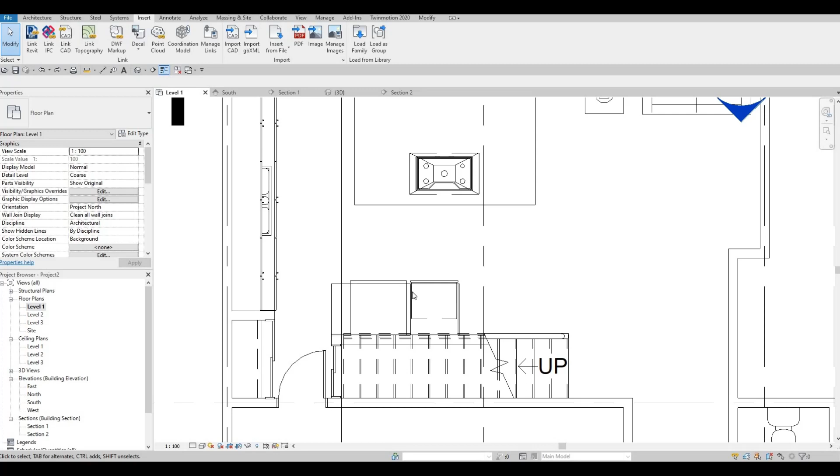So in the previous video, we were able to finish off the kitchen. And as you can see, we have the island and we have the fridge here. And then we added some furniture. And here we're going to continue working on this. And what I want to do is I'm just going to pull this back because I want to add an extrusion later on here. So I'm just going to leave it like that.

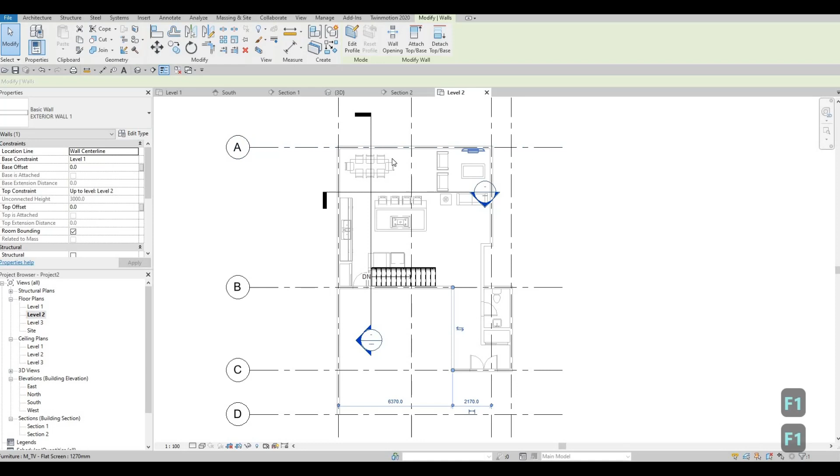But what I want to do now is we should add the second floor. So let's go to second floor. So it will be right here, level 2. And then as you can see, we have an overlay of below. So that's fine because we're gonna create some of the perimeter of the walls with this one.

So let's press escape multiple times and then click on architecture, click on wall, and then we want to make sure that this is exterior wall. And then after that, you want to make sure that it's up to level 3, which it already is, and it's centered, and then it's chained. And then now we're ready to add it.

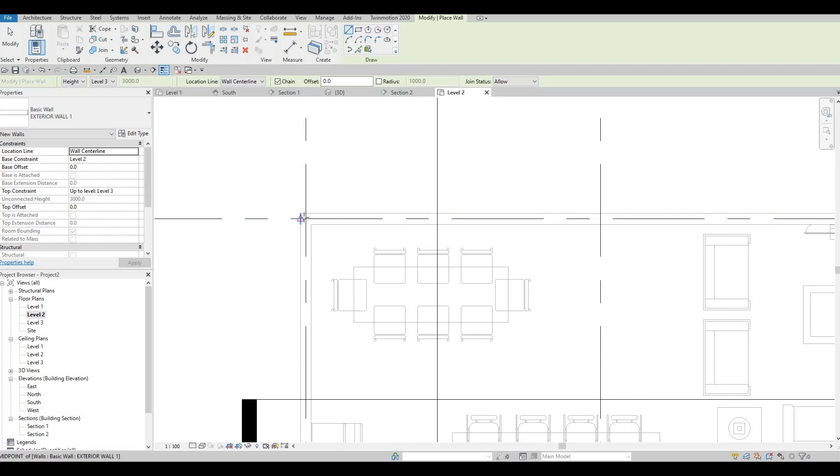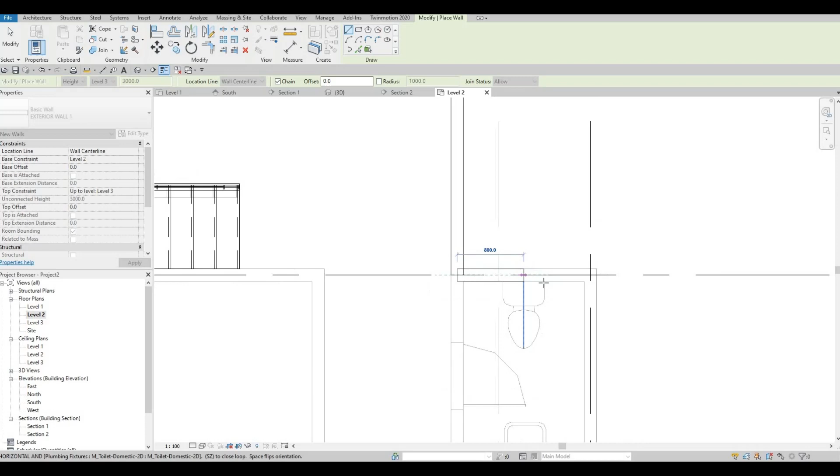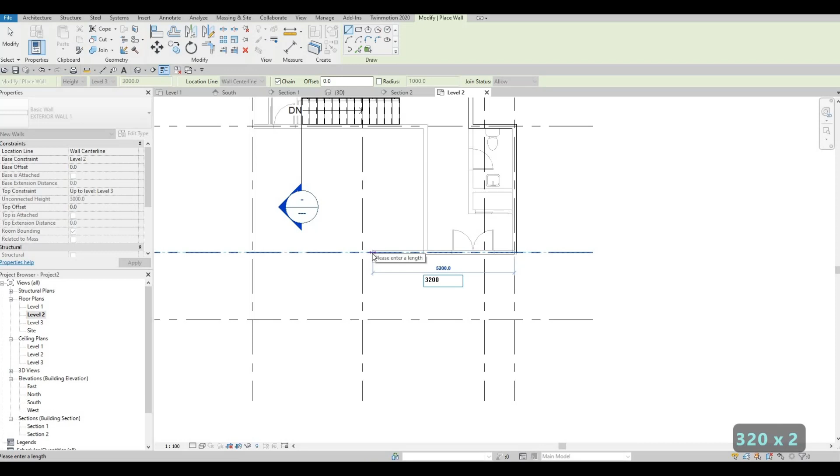So click on A1 up to A3 and then going down and just copying this one at below. So we're copying what we did below. Move it like that. And then now here, what I'm gonna do now is to connect this one up to here all the way to the left side, but typing in 3200. And then after that, after the 3200,

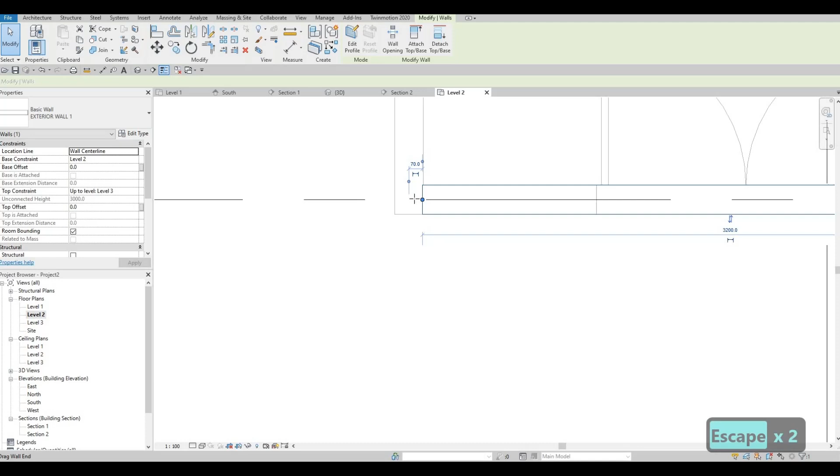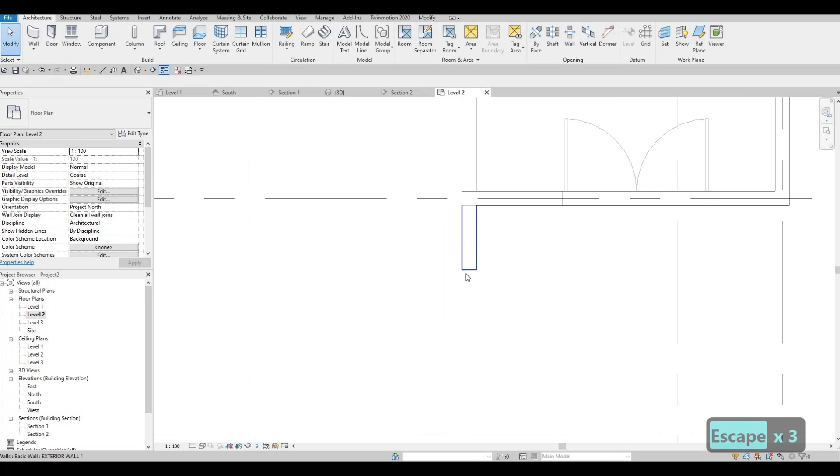what we could do here is click on the wall again. So I press escape so that we could just go on up to here. And then let's just connect this one again like that. And I want to make sure that we have everything aligned. There we go. And then now here, I want it to be around 7 or 800. So I just put it at 800.

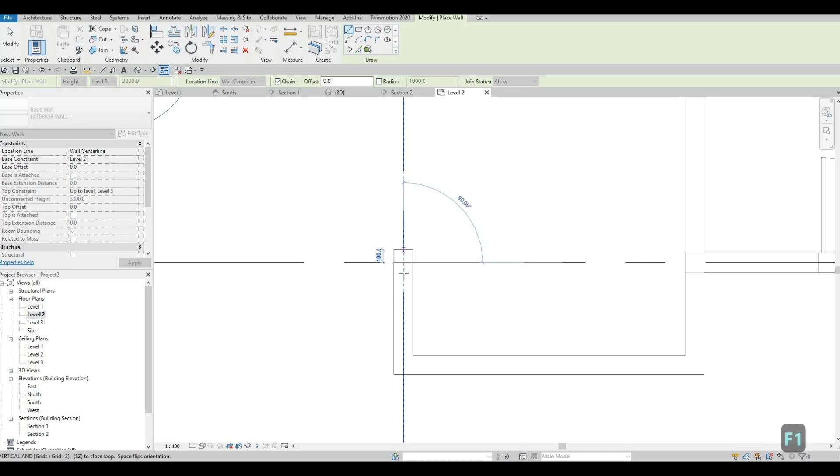And then now we're going to continue working on this and just connect it like that up to this grid line, which is number 2. Go back here. And then now give it a little bit of a gap here. So what I'm gonna do here is we click on CS. Now we're just gonna extend this wall around 500 could be good enough. So you can type in 500. So we're basically clicking here and then just clicking 500.

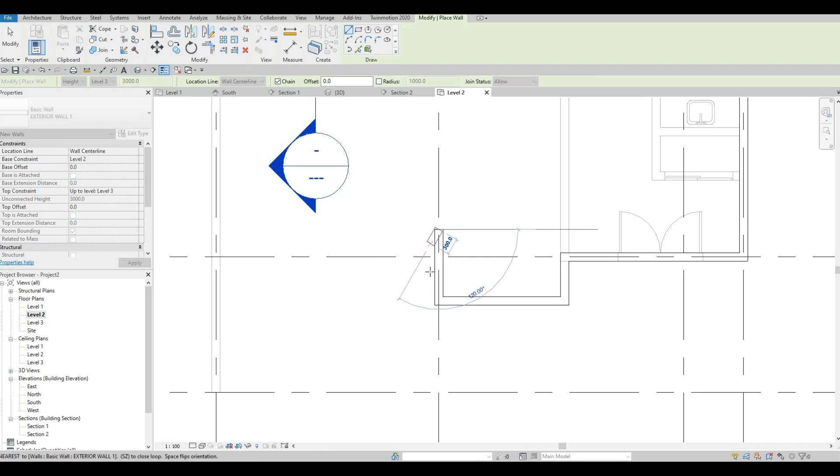And I just want you guys to follow it. That's why I did multiple clicks. But as you can see, this will be just one single wall. So now go up to the number 1 grid. And then you want to finish it off and go into A1 grid. You can then press escape multiple times.

And then now we could go to our properties and then take off range base level under underlay, and then we should put it at none, and then click apply. Now everything will disappear and we won't be able to see what's going on down. So that's fine.

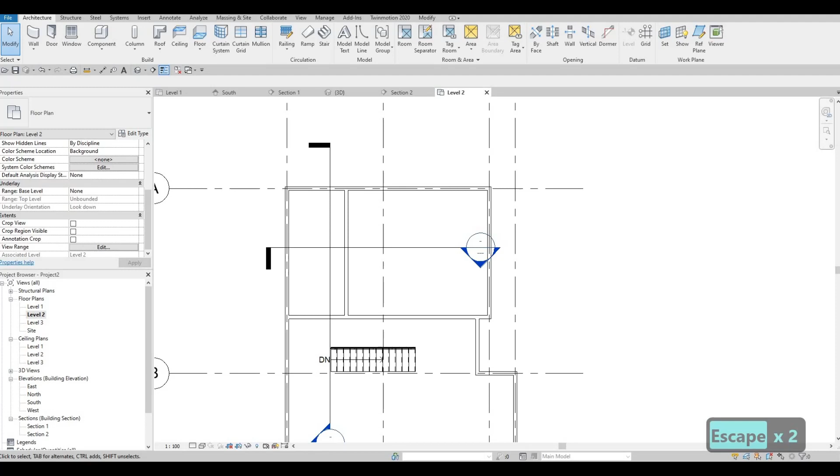Next thing we're gonna do is let's add in the interior wall. So let's change this. So I click on the wall and then just change this to interior wall. And then once we do, we could just connect this one all the way to here. So that's done. I'm gonna add in a wall like this right here. And then through that, we could set up how far it should be.

So here, I'm going to move this temporary dimension right here. And then from here, I'm just gonna type in, I want it to be 980. So it went back because I set it from here. After that, let's add in the same wall. So you can type in CS now and then click on this wall. And then now click on the wall again and you want it to be set around 3140. So 3140, it will be right here, and we're gonna set it up again.

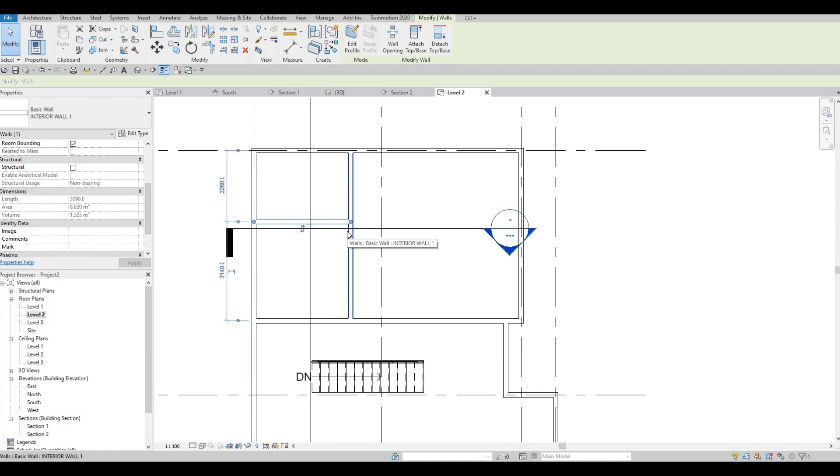So let's add the same one. So click it, CS, and then let's add a wall right here. And then that wall should be around 1340. And then let's add in something like that. And this one will be around 1240. So that's fine. And later on, we're gonna pull this out because this one is a shower area.

And then now, let's add in more walls. So now we're just adding the walls so that we could manipulate the area. I'll be adding a wall right here. So I added the wall somewhere right here for now. And then add another wall right here. And then this wall should be around 1300. So that's good enough.

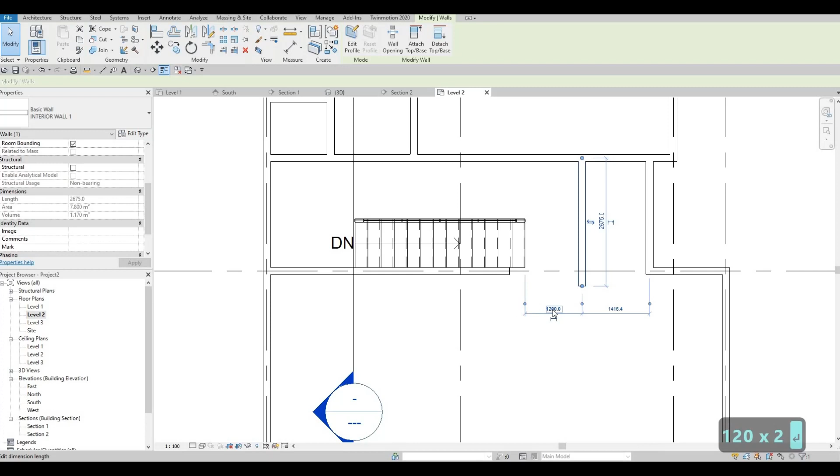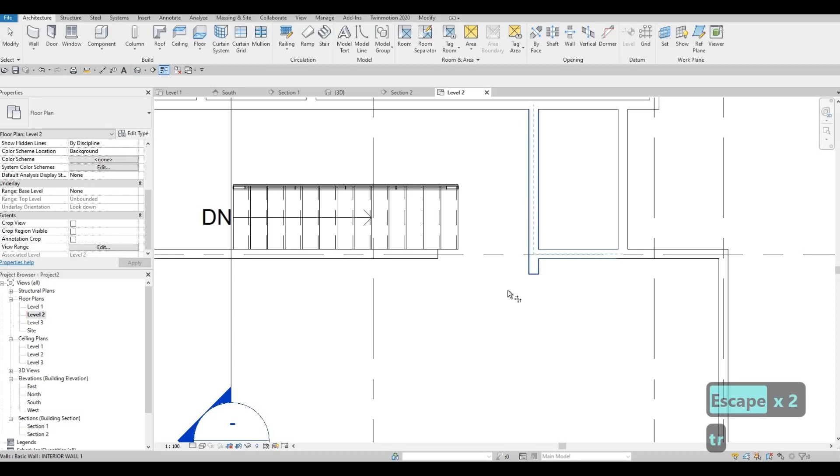Maybe we could put it at 1200. So I put it at 1200 like that. And then we're gonna add a wall right here as well. So CS on this, and we're gonna pull this back. Let's use trim and extend so that we could just trim it like that fast enough. And then same wall, we're just gonna add in a cabinet here, like so. That's too big, so around 600 will be good enough.

And then 600 by 600. Okay, we're going to extend this a bit, maybe around, I'm gonna pull this one around 1000. So let's check that earlier, how far will it, so around 1000. So that's good enough.

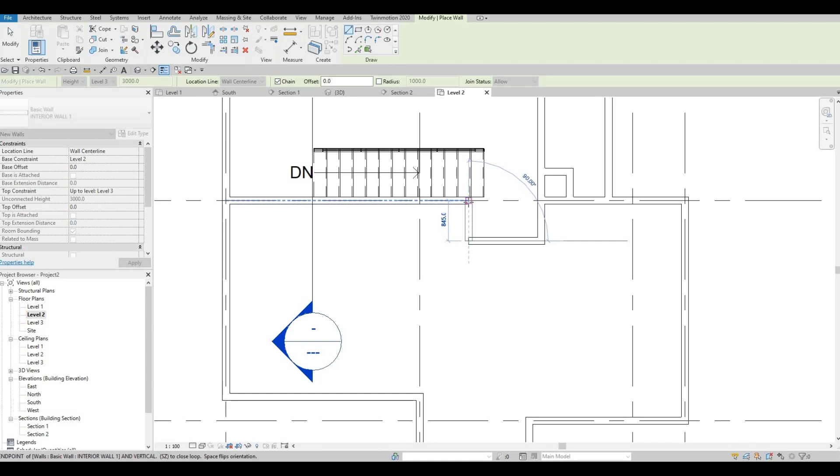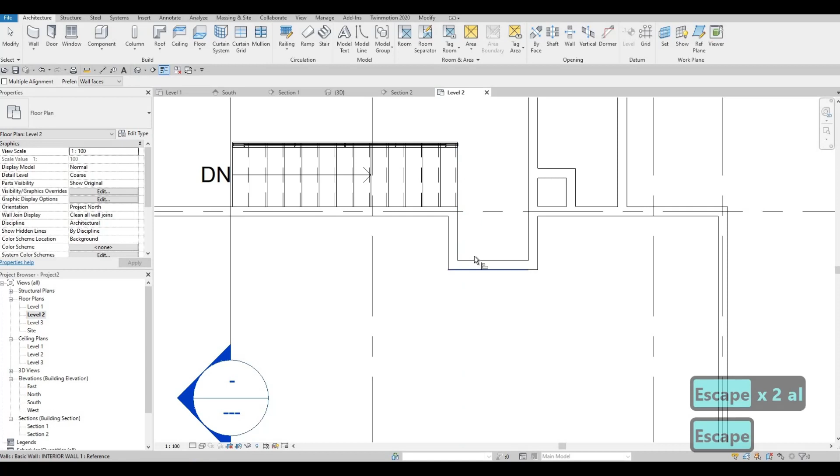And then CS, let's add this and close it off like that. We're gonna pull this out so that we're not bothered with this. So CS, so align it. So AL to align, and we could just pull this back a bit because we have our temporary dimension right here, and we could set it off now at around 1100. So that's good enough for our doors.

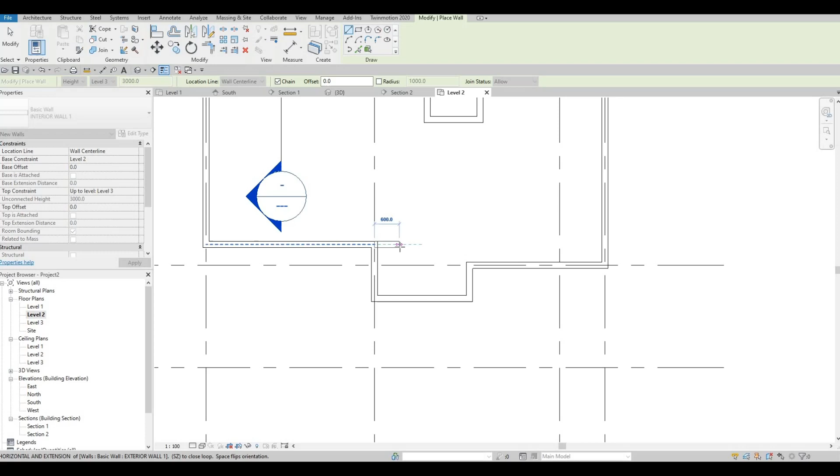And we should click on the wall again. And what we could do is we could extend this one a bit, around 500. Add it like that, and then use trim and extend TR. So we have our door going in, and then we're gonna have a closet right here. So click CS, and then let's add a closet right here, around 800. And then the size here is around 24. Let's put it 2400. So that's good enough. That's big enough for this space.

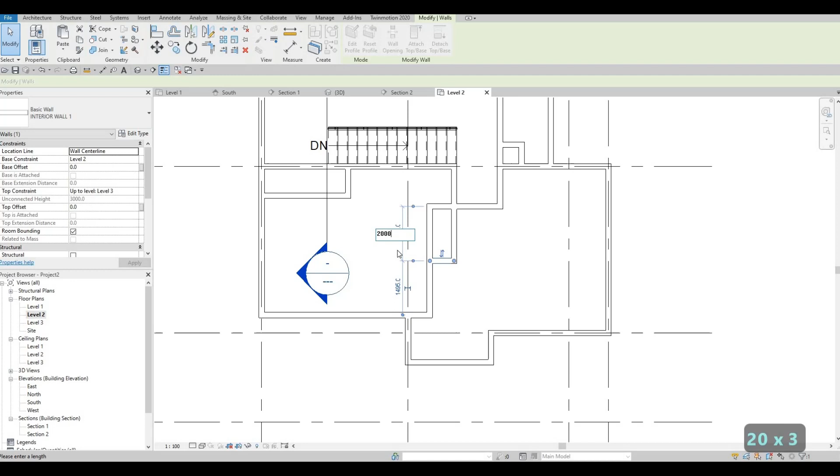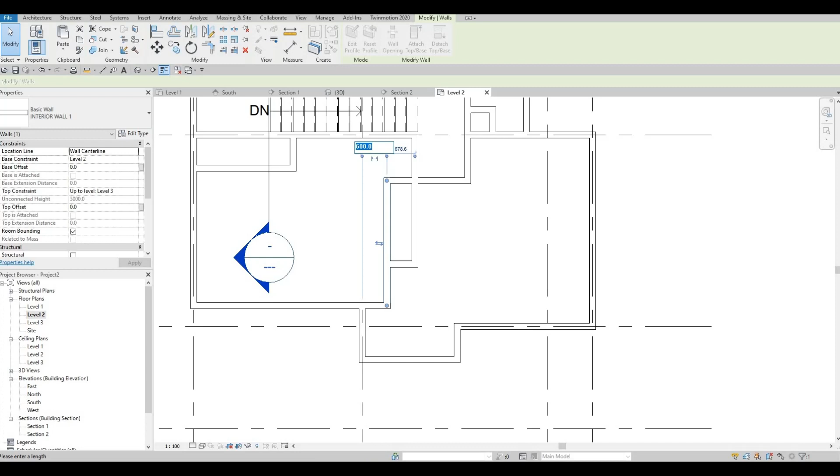And then here as well, we're gonna extend this, and then click on the wall again, or do a CS. We can extend this and manipulate this now. So from here, let's put it 2000. More than enough space. We have a space here as well. And then now we could move this a bit. So instead of 500, let's put in 600. So let's extend that a bit. So that's fine. I'm happy with this.

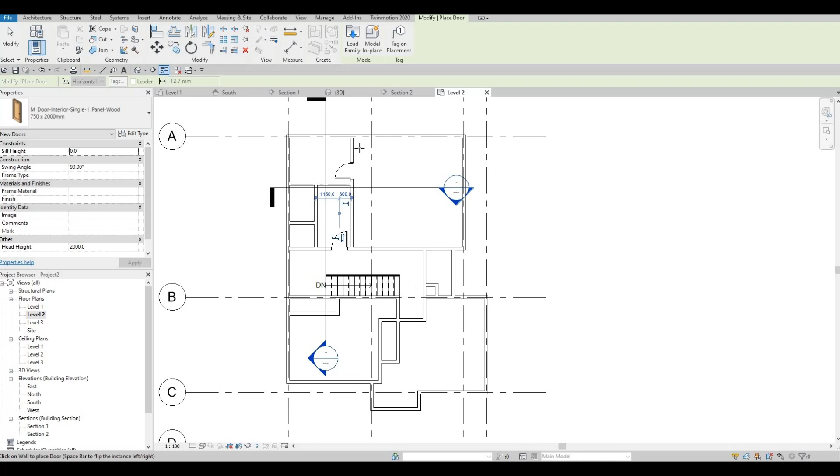Let's add in the door so that everything is clear. Let's use the 750 by 2000, similar below. So here, let's add the wall of the door right here, and it should be going in like that. This will be the washroom for everyone, for these two rooms, and then for this master, we have an entry. And like I said, we're gonna pull this out because this is a shower.

And then now here, we can add a door for the entrance of the master. Here we have a door for this room, and we could add the door right here for this room. So that's good. Everything's getting cleared.

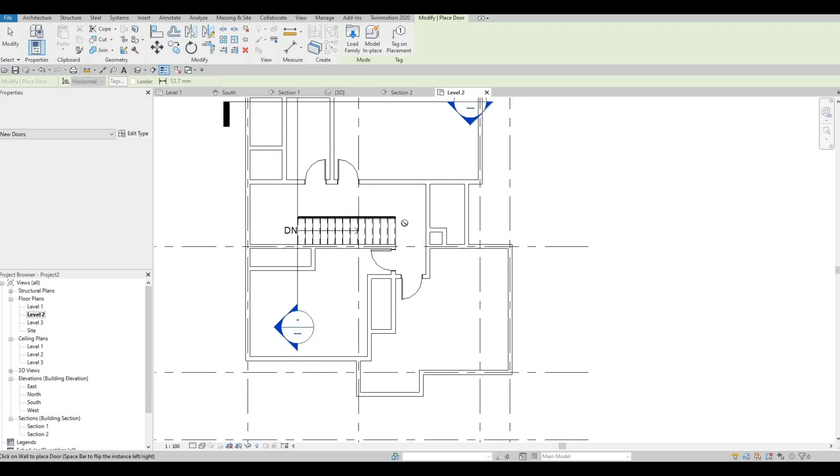Click on door again, but change to the sliding door. So let's put in 1200 by 2000 again, and then let's add 1200 for here, and then press escape and then click it again. Now we could change this to 1500 or whatever fits. So maybe 1700 will be good enough for the size. Here let's put in 1500. This one 1700. And this one let's put in a door. So CS and add the door like that. This will be the walk-in closet.

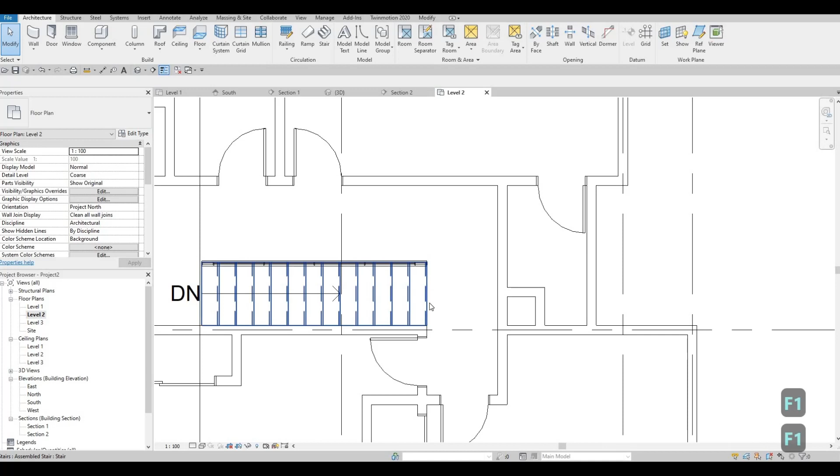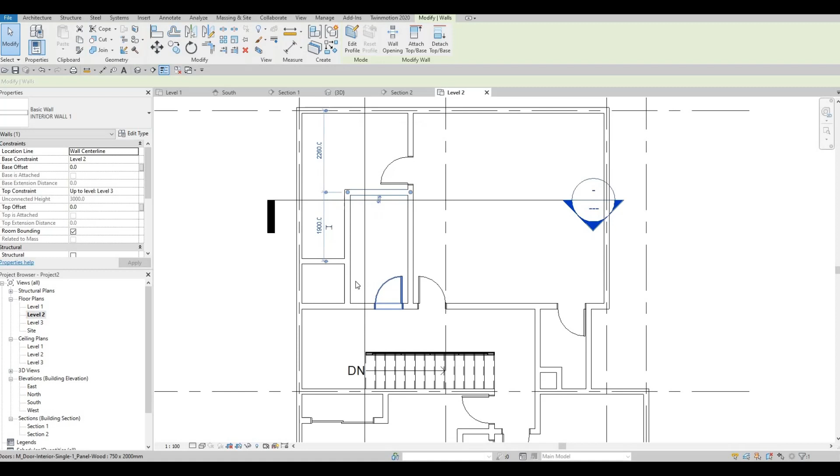Let's see the size here. 1200 is more than enough for the space. Just we're gonna add in some sort of barrier here, because we're gonna go down here. This is where the stairs are, and we need some space there. Okay, let's clear this up. And then this is the laundry. So we could click on this, and then we could just add a door right here for the laundry.

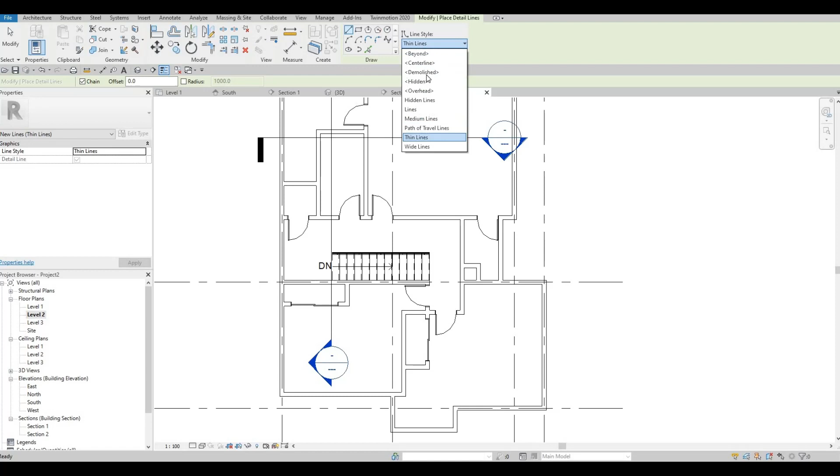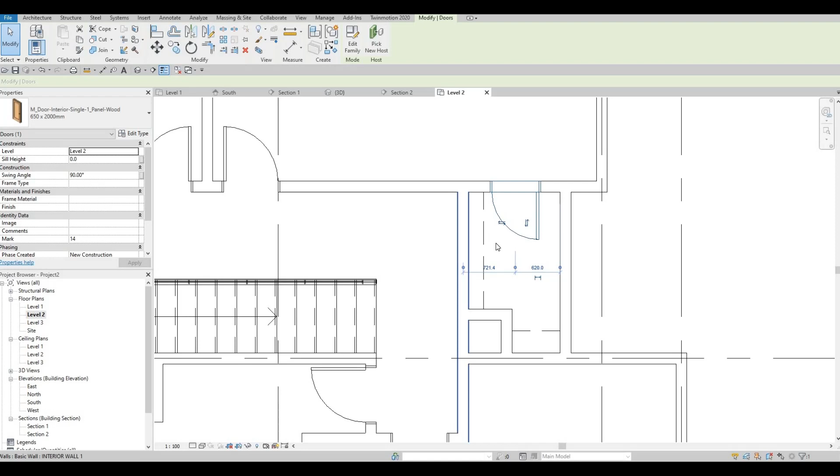And let's add in some details here. So go to annotate, click on detail line, and make sure this is demolish. So we need to add 2 lines like so to represent the rod. Okay, and then here as well. We can make this smaller. So around 650 by 2000 would be sufficient, or we could add a sliding door. But I think a small door like this will be good enough.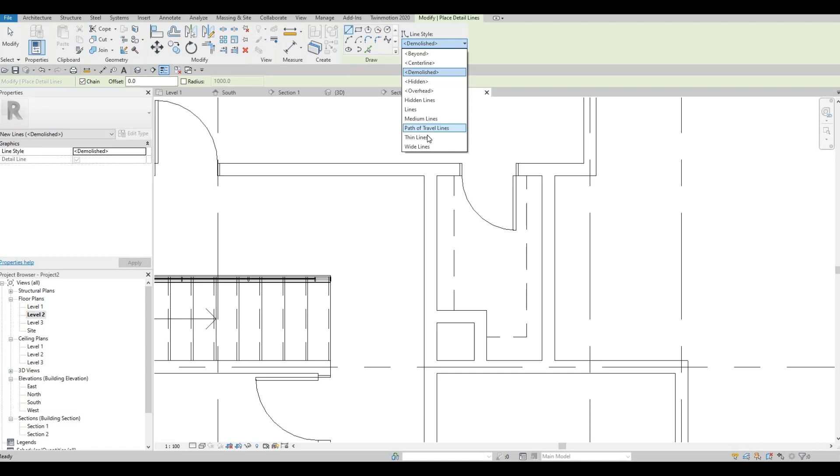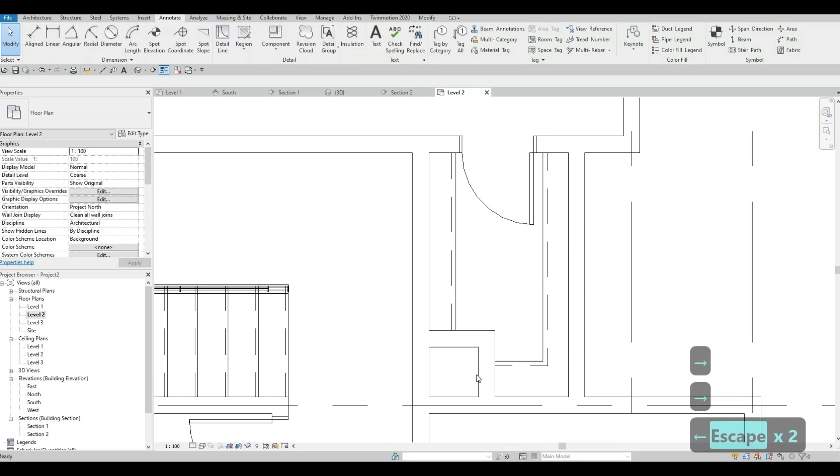Easiest way is you just click on this and then type in CS. Let's put it on the middle like so, and then we could just trim this and then move it in place. And then after that, let's click on detail line again and then put in thin lines. Like that, and then let's add it like here, and then use trim TR to connect them all together. And then we could just move this one a bit so that it will be similar flow there.

We could add in a desk here later on, and then the beds as well. So let's stop here for now and continue on the next video.